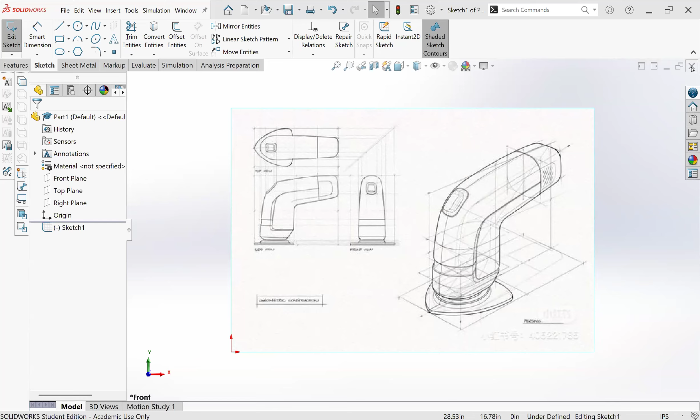All the fillets. For the first step, I'm taking a screenshot of each of these so I can upload them in the corresponding plane. I came out of the file. I'm going to go to, for example, my front plane and bring in the front view of that model by going to Tools, Sketch Picture. So this is the front view.

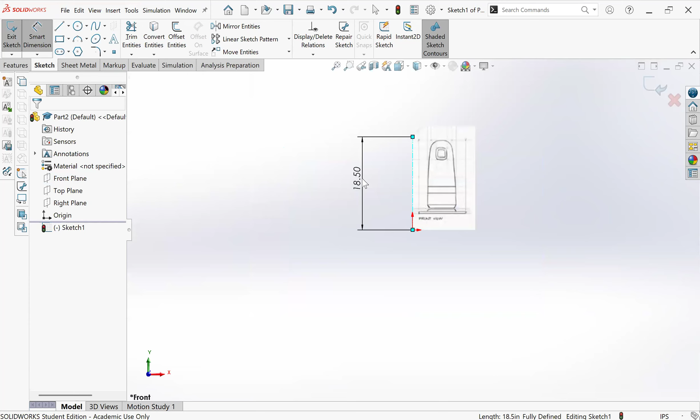I already measured the full product is 5.5 inches, so I'm adding a center line for that measurement to help me resize all of my images. I'm going to try my best to center this hand sketch over that center line and bring in each of these sides one by one.

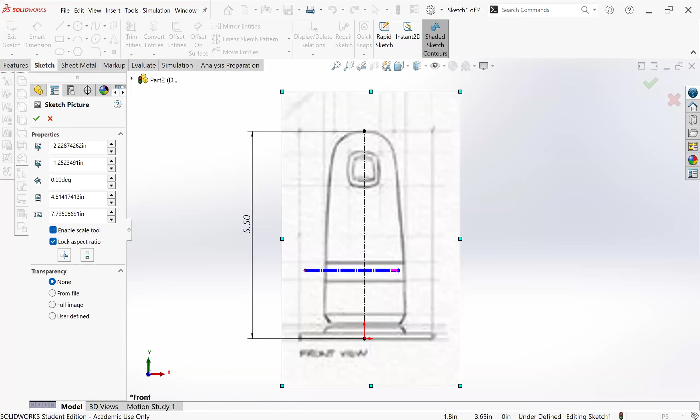That looks pretty good, I'll go a little bit lower. All right, I'm happy with this. I'll just do a slight transparency, maybe 20%, since it's a light picture. So this sketch is done, and this is going to be my front view.

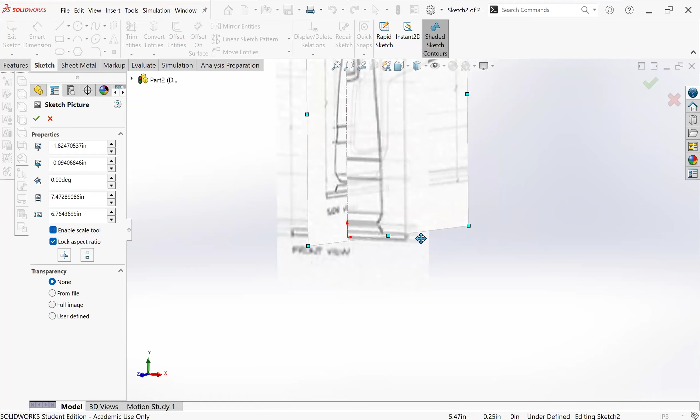Then I will go to the right plane and we'll do the same thing over here. We're going to bring the side view, and this time we're going to use our reference on the front to resize and match up the sketch together. So basically the middle of center will be there. I need to check the heights.

This portion takes slightly a little bit of time, but once we have all of them, we can see that this line and that line are matching, so that's good. I need to check the bottom. So it looks like my height is matched.

We need to make sure this is also on the center of the image. I'm going to slightly rotate to check these lines are matching up. This top line is slightly off, but this line's matching up, so I might just make my image slightly larger. Now we have all these lines matching up.

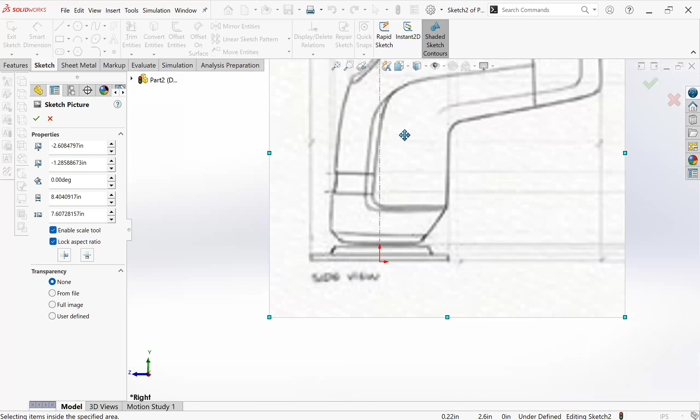I'm going to double check from the front and back, make sure this is centered to that. I think I can push it a bit more forward to center this. And also I can look at the button. Sure, the button does not look right.

This looks too large for the button, so I need to move this down. Let's double check again, now it looks good. You can see, so there's a line. Okay, I'm going to check on this as well.

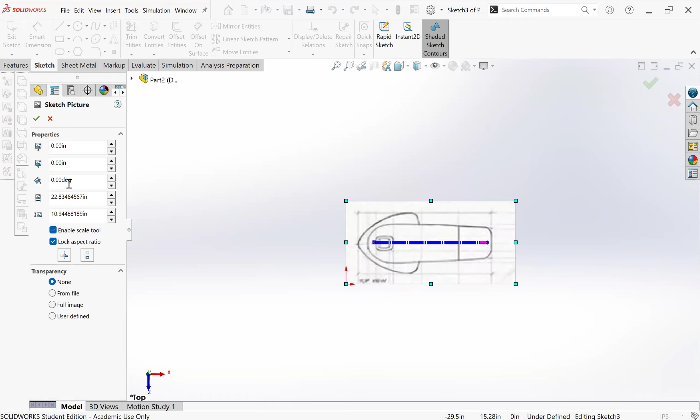Now we have only the top view left, so we'll go to the top plane and do the same exact thing: Tools, Sketch Tools, Sketch Picture. This would be our top view. If it comes rotated, here you can change the orientation, say 90 degrees. Okay, that works out. Need to minimize this.

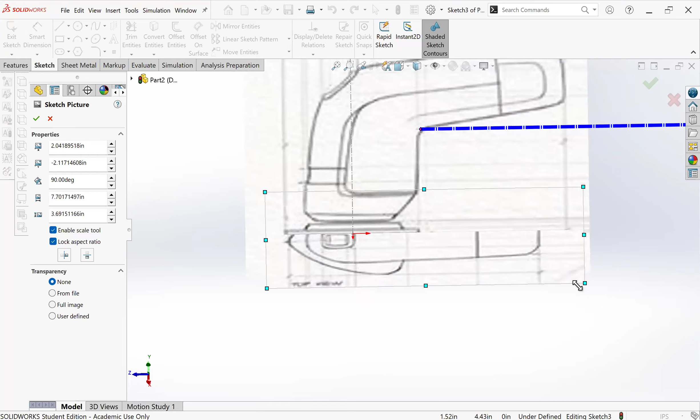The reason we bring in actual hand sketches is because if we design in SolidWorks, everything looks very geometric and clunky, and you don't get those gesture lines or nice curves that a hand sketch has. So that would be the main reason. To stay true to your design, you can bring an actual picture in here and try to follow and build on it.

So I'm trying to match that side. Let's see. Looks like this line should match with that line. Okay, now it's better on this. This back is also looking better. See?

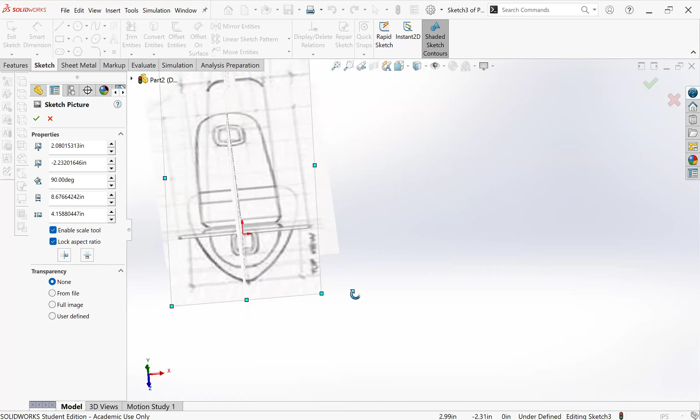Let's make sure it's also centered. I think this needs to go slightly that way. This looks a bit more wider. Let's see if I make the whole thing a bit larger.

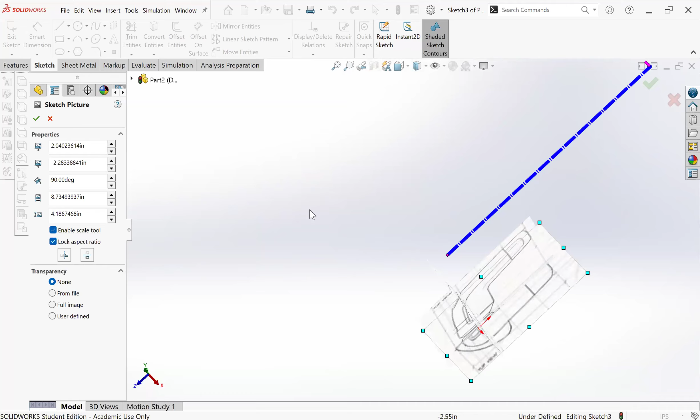So this front also matches. Check from the top again, make sure it's centered. It looks pretty centered.

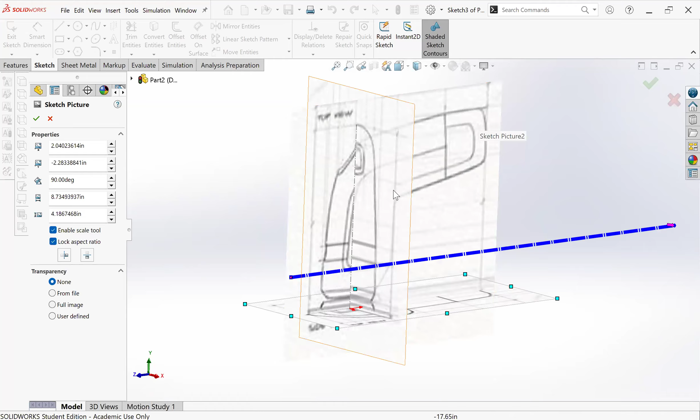Okay, so we have all three images here. You guys can almost see the product. I might go to the first one and drop it, or the second one and pull it up a little bit so these lines match. As we can see, something shifted on that one.

So it takes a minute to set this up, but once we do have it set up, everything else will be really easy and smooth. Okay, again, I'm looking at that line, that curve, and I think this is slightly below the origin, so I'm just going to push this up.

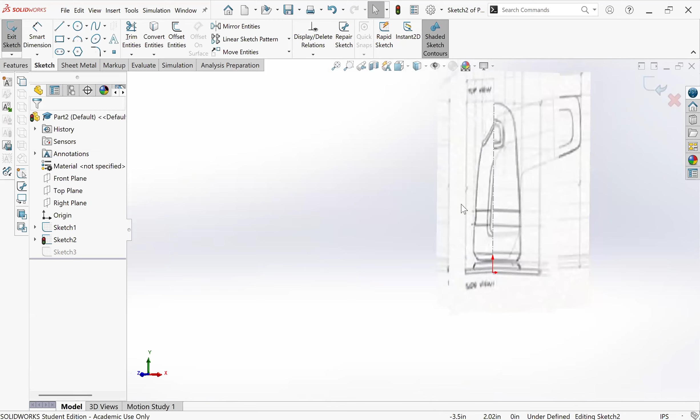Okay, that looks much better. All right, so now that we have all of our form here, we're going to talk about the process of building this product.

If I look at this product, there's a body on the bottom and this main form. The body on the bottom is pretty simple, with a few extrusions done here, and then we create a connecting cylinder into the form. But this main body just uses a loft, and we need multiple planes to do that.

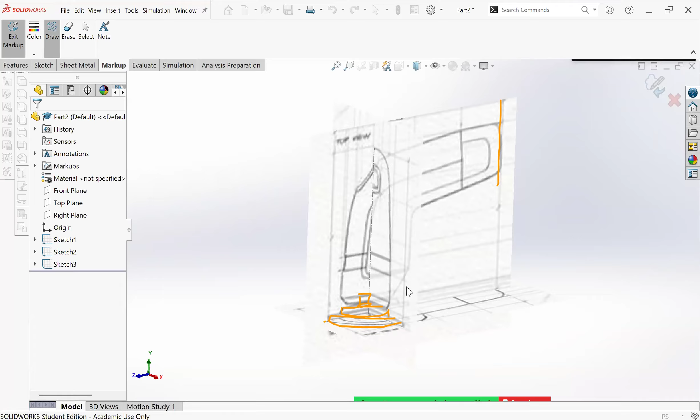We definitely need a plane on the end. We need a plane right on the back. There's a slight slant, so we need a plane right above that slant. And because it's curving, we're going to add a plane over here.

So we have three sections. Then we also need guide curves connecting all of our sections together. For timing, we're definitely going to ignore any details that exist, so no button, none of these cuts. We'll have two main bodies when we're done with this whole form.

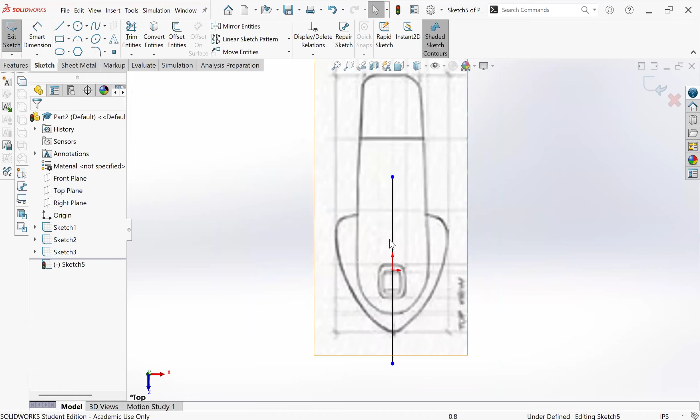All right, let's start from the base, the easy part. We'll start with the top view and use my center line, the midpoint center line, because this whole form is symmetrical. I'm just going to use that to my advantage.

This is the construction line. So definitely, anytime you mirror a spline, you need to set it perpendicular to that mirroring plane or line.

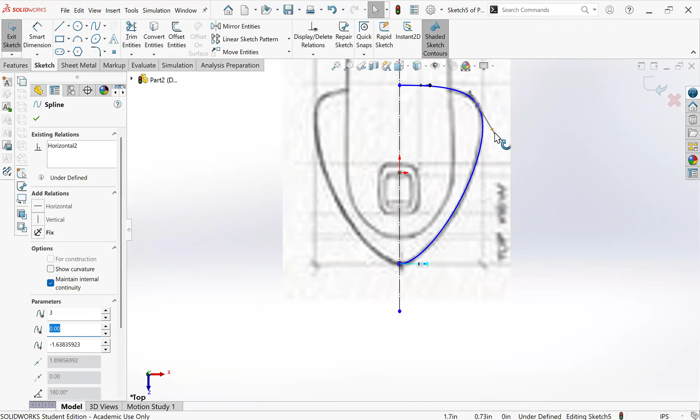Use as little points as possible. The more points you have, the less smooth your curves will be. Okay, this is good. Now I'll mirror this over this line.

Perfect, with both sides. I can push this slightly so the other side also looks a bit bigger. That's exactly why we mirror things. All right, this is done, and it will be a simple extrusion. Let's take a look.

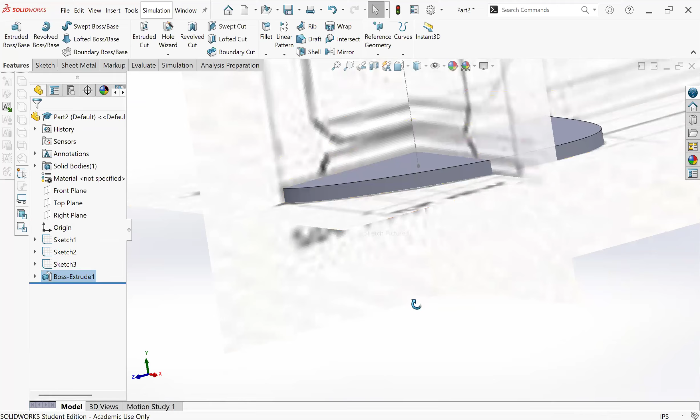So it looks like about 0.15 inch, and the next portion is actually a circle.

We're going to come on top of this shape and do a sketch. I'm going to be aligned with my center, but I'm not going to click on the origin because I don't know if this origin is the center of my shape, so we don't hook to that. In case you did hook it, and then you come in and realize the back is way farther back and this needs to move, all we need to do is delete that relationship.

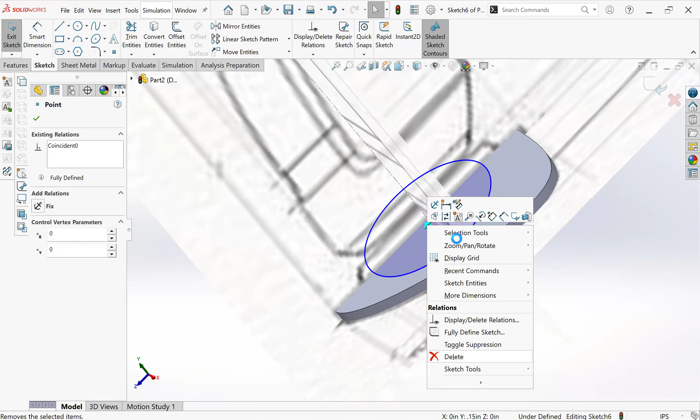Okay, so I can see that this should move slightly back, and I need to make it slightly larger. Okay, the sides look okay, the front still needs a bit more. I'll shift this more toward the front.

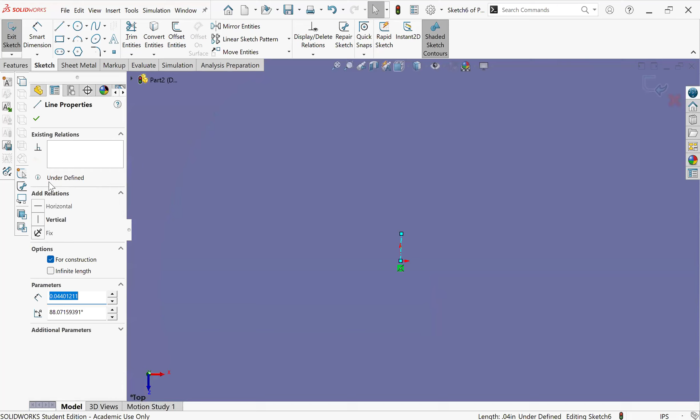Okay, let me double check. It's pretty close. I'm going to put a center line from the origin to this to make sure I can have this be vertical. Then we'll give a measurement of 2.3. That seems precise, we'll keep that.

Looks like this form here has a slight slant, so we'll extrude it with a draft. Let's do a 0.2 maybe. Yeah, that looks good, and we're going to need a slight draft inward. Clicking on the draft, we're looking at the back and the front. Okay, yeah, that looks pretty good, so let's do a 25-degree angle to round things up.

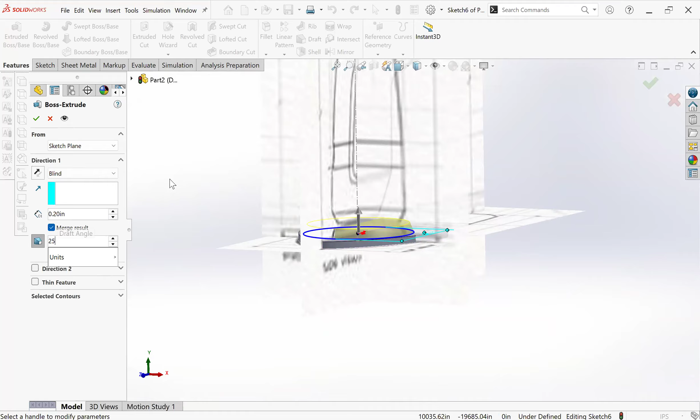All right, we have two of our forms done. Now to click this into the body and the motor and wiring part, we do need a cylinder, which we cannot see, so I'm just going to come in and add a small cylinder anyway.

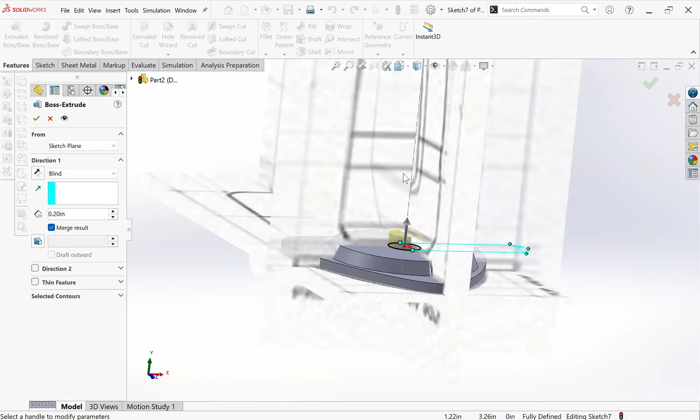So here we go, I'm going to do this. Imagine this would be a part that connects to the rotational or vibrational portion. Feature extrude. Also, because this has to go into a pin, I'm going to do a thin feature on this, maybe on the inside, and go up for 0.5. So it's basically connecting the sander to the other part.

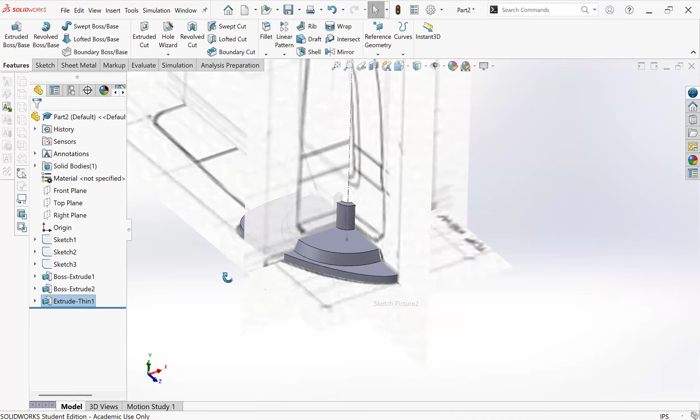Okay, so this would be our body number 1. And we're going to come in now and build the planes to create the loft for body number 2. Because we have this slant here, I'm going to start my first loft above this, so it's going to be a plane over here, one here, and one on the back.

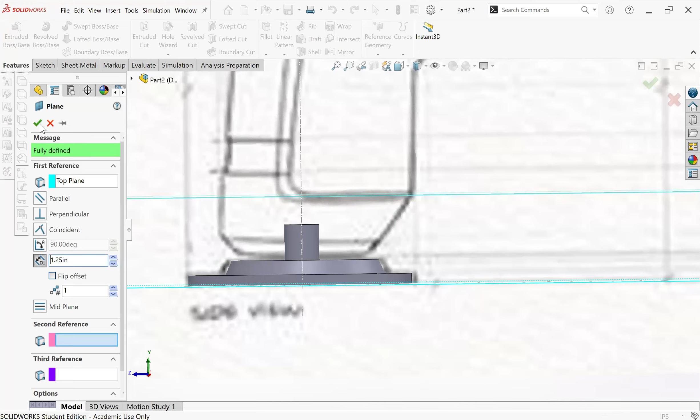So when I click on the top plane, hold Control, and come to the side of it, once I see the 4-arrow, I'm going to click and drag up. This copies in parallel. Okay, so 1.5 maybe, just to round things up, and I need one more in the back.

Front, we'll hold control, click and drag. That looks good. We know there's a slight slant that could be achieved with a fillet later on.

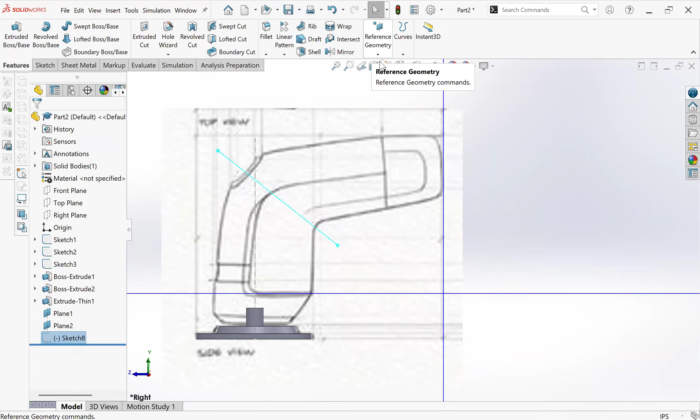Okay, now we need one in the middle. To create a plane exactly where you want an angle, one way is to just draw a line where you want your plane. So this is going to be my line of reference. I'm going to come out of the sketch and go under features, reference geometry, and plane. Now we pick this as a reference geometry. We also need a secondary reference, something that would be perpendicular, which would be the right plane. Okay, so now that we have a fully defined plane, I'm going to turn off my sketch.

Okay, good. So now we have 3 planes where we need our sketches. I'm going to make these slightly smaller so our view is clean and clear.

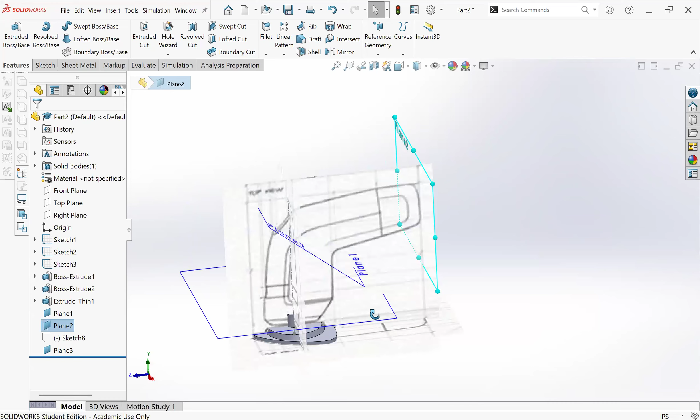Okay, we'll start with, so because the form is symmetrical, I'm only going to build half the sketches. We have one side flat, so that would be easy. The other thing that's really important to pay attention to: this back part is more of a square, but the front part is curved. So if I go back here, so you guys can see the image, sketch tools.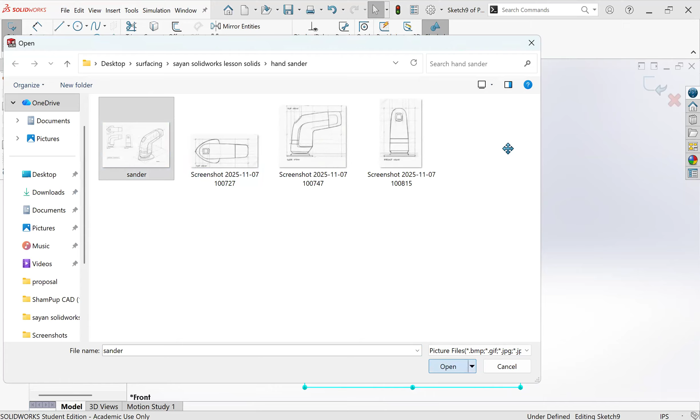So if we look at this one, can't make it any bigger. Just open it, probably, so we have it as a view. This front is rounded and the back is flat.

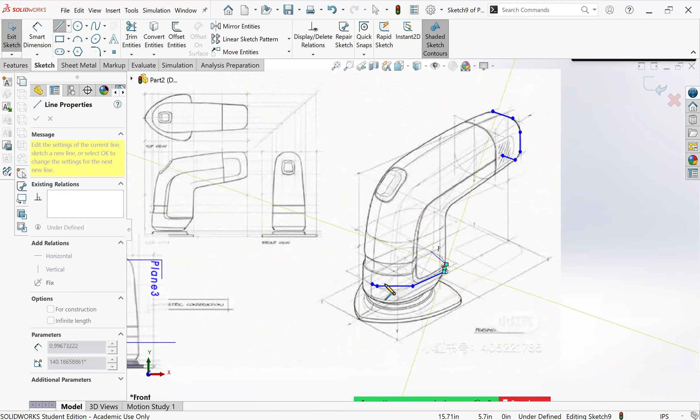The key is the lines going from one sketch to another sketch. For example, if I have a line here, and then a curve, and then another line, then a curve, and then another line, so we have 3 sections of line and 2 sections of curve, that's 5 sections. So when we come here, we still need to do the same thing, we still need to find 5 sections. That's the key thing to get smooth lofts.

All right, I'm gonna come out of this, that was just for the reference. And we'll come to our plane 1 and start sketching. Let's start with a rectangle because we're starting on one side.

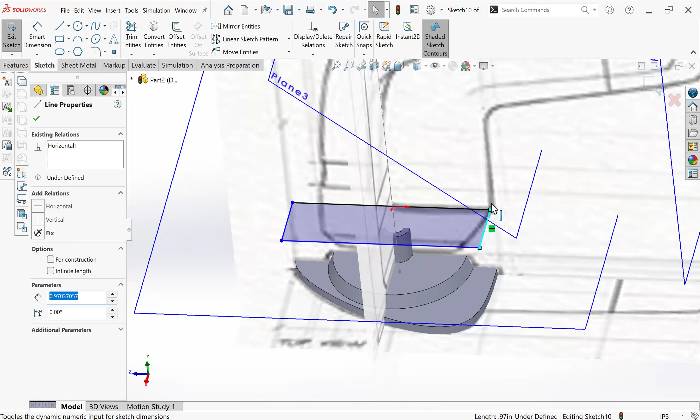First, I need to make sure this origin is on this line so we don't pass the midpoint, because we are trying to mirror the whole thing. So now I'm looking at that line, trying to match up, and also on the front. Okay, now we'll look from the front.

Okay, this needs to get slightly wider. Even more. And I can look straight down. This actually looks pretty good.

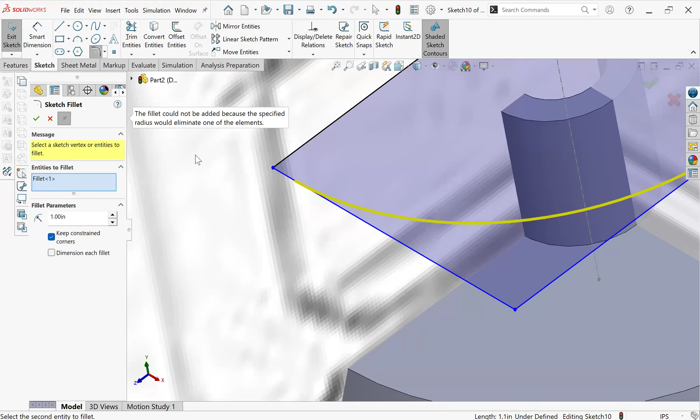So now we come in and fillet. The front has a very large fillet, the back has a slightly smaller fillet. The front's almost smooth, but as you can see, I'm leaving a slight flat, I can't go any more, so 1-inch fillet with a slight flat. So when we go to the back, they kind of match up.

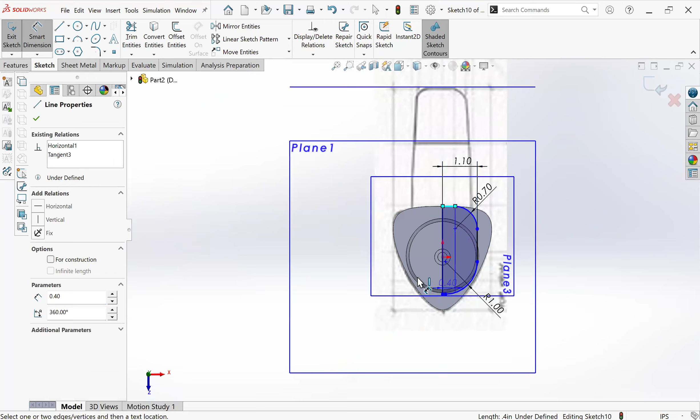Okay, and then this one we're gonna go down, maybe 0.7. Okay, so the sketch is done, gonna finish and come out. I did not add any measurements. We can, sorry about that. Let's see, this is a 1.1, and our height is, I'll just do it, 2.7 to round things up. Okay.

Now, line number 3. I'm gonna do another sketch, one more time, a rectangle, then this side. Need to match for this end.

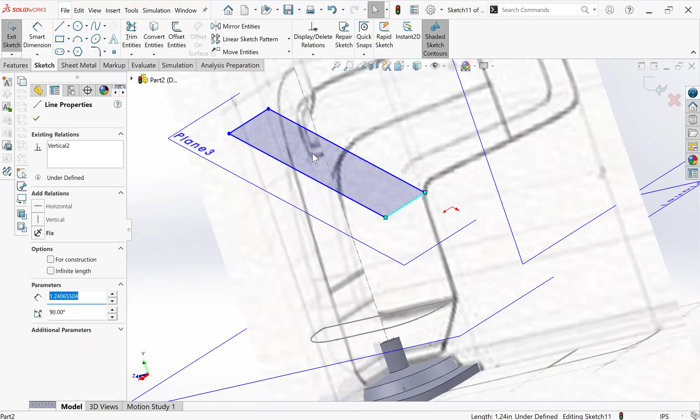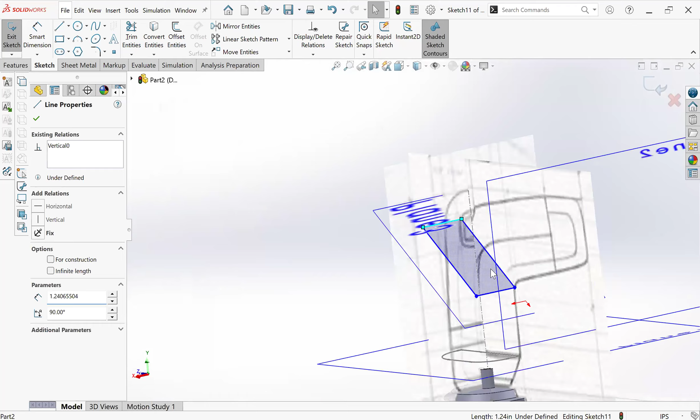On the top, up here, we're gonna ignore the button as if this curve was complete. So I'm gonna come in, probably a bit lower than that. It seems okay. Now from the side, also needs to line up. It's slightly tricky. That might be decent.

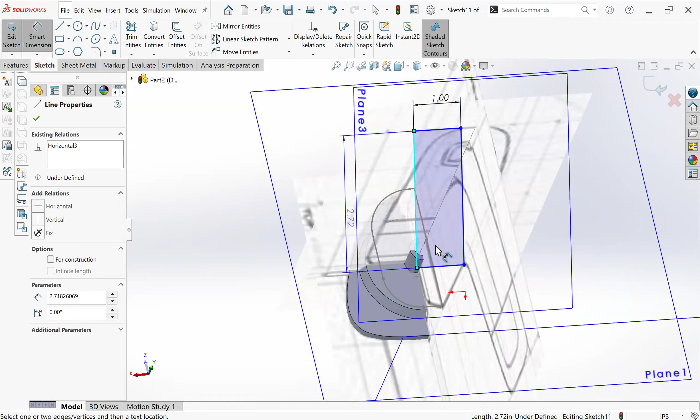Okay, let's do some measurements. I'll just do a 1 inch on this one to round it off, and again it's a 2.7. And need to make sure we're aligned with this origin so it doesn't shift past the midpoint. I'm gonna do this and set that to be vertical. Oh, the other way, horizontal actually. Right now it's just turning black, which is what we want.

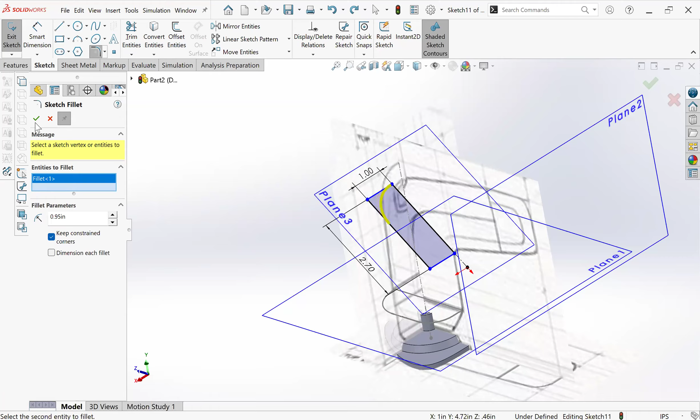Okay, let's add the fillets. That might have a problem with our 8, 9. Okay, I'm doing 0.95 because the other fillet we did was a 0.1, was 1, and then this is slightly smaller. Now this one we're gonna go even, so it was a 0.7, so I'm gonna try to do maybe 6, slightly less, and this is done.

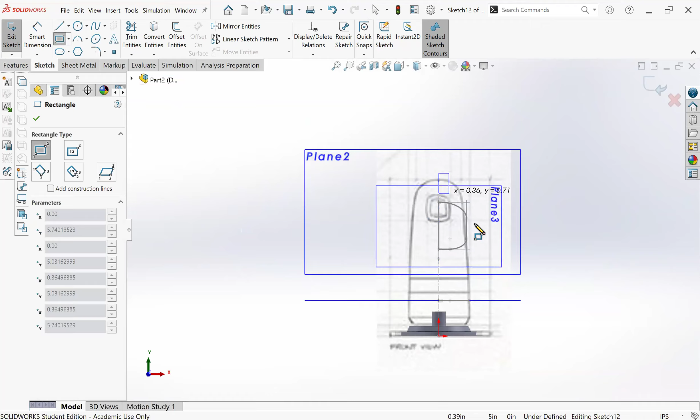Now we'll go to the last plane, and this would be the easiest of all because it is a rounded square. One more time, I'll start with a rectangle, then try to match the top and bottom. I want to kind of imagine if this line continued, how that would look.

Okay. And there's that line. I look from this side now. Somewhere there.

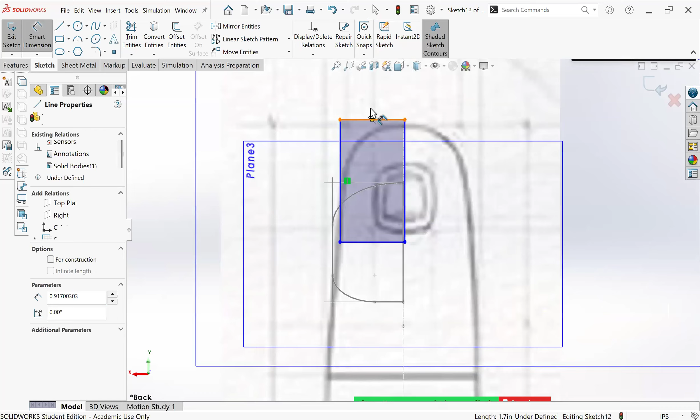Okay, let's add some measurements again: 0.9, and 1.65, or it could be a 1.6. So it is slightly getting smaller, this whole product.

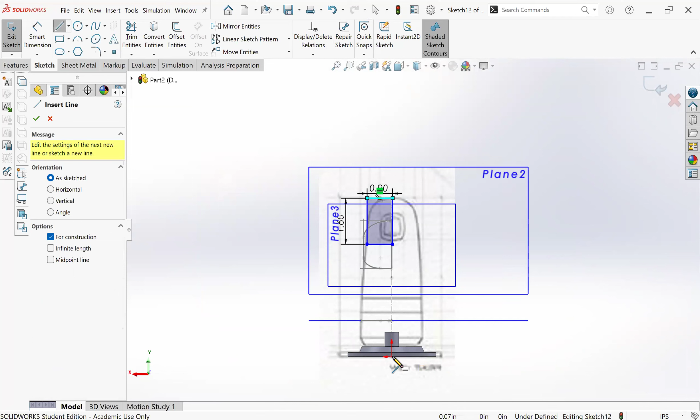I do still need to make sure this is staying on the correct half. So a center line, setting that to be vertical. It might also get smaller than this because the front was 0.9, so let's do a 0.8.

So this is now a square because 0.8 and 1.6. Now we'll come in and add fillets, and the fillets are even. A 0.5 fillet, should reduce one. I think 0.5 is looking okay.

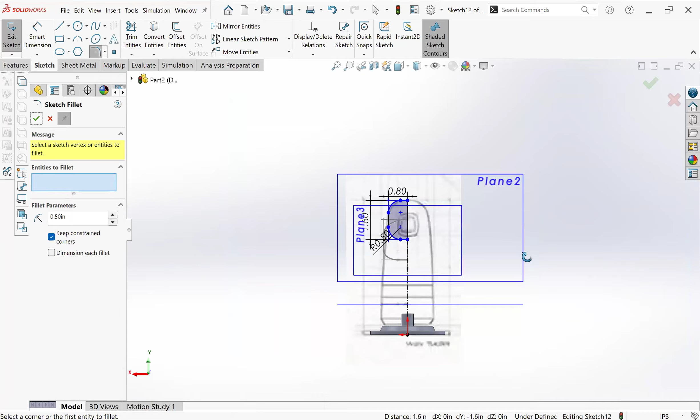All right, that works. Let me see if this needs to be slightly lifted to that line. Yeah, so now that we have all of our three sections, I'm actually gonna hide these planes. Now that we have all these three sections, we're gonna come in and put a guide curve here and here. Make sure you save your file.

So I'll go to the right plane and use the spline tool.

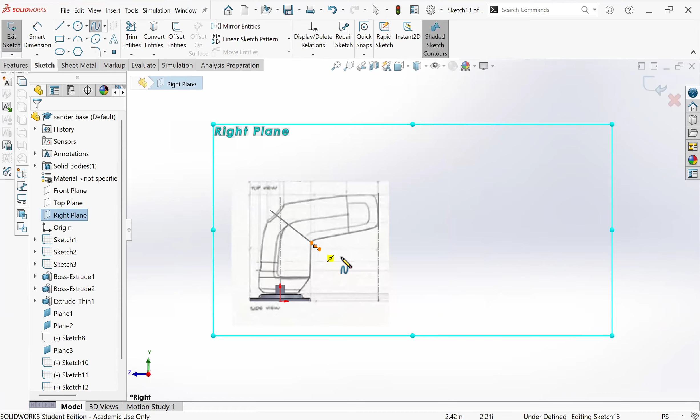This is important, we only have three sections, so we only need 3 points. Just gonna make sure I click on them. If they don't click, you can later on, for example, I'm just gonna set this on the side. If it doesn't click, you're gonna come in, select one, hold shift, select your other point, and press coincident.

So now you know they're actually over there. And when I try to pull this, you see this was not connected. So one more time, when I click this, hold shift, go like that, and coincident. Now everything's black.

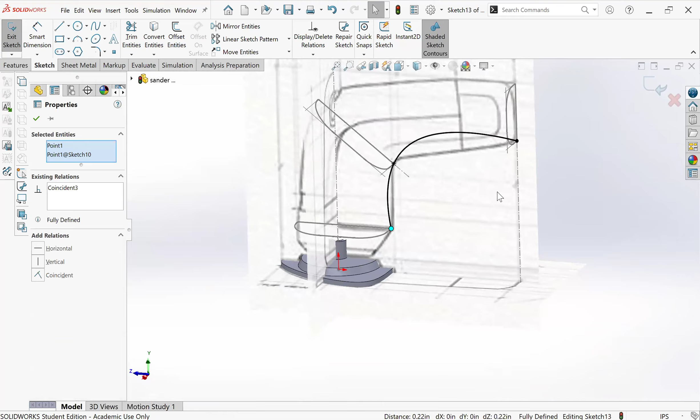So trying to match this the best we can. Okay, that's slightly better, it needs to come down.

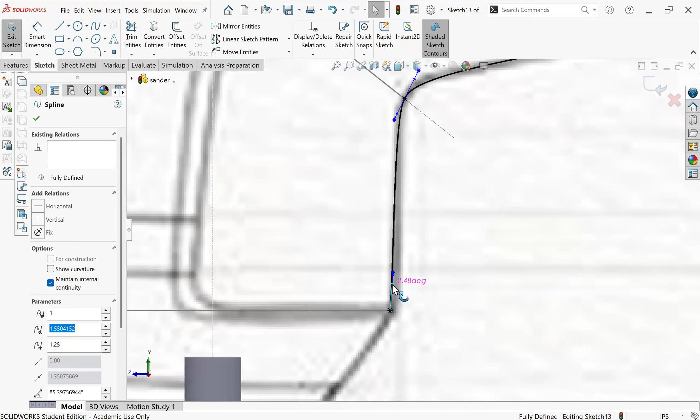Right, this is one of our sketch. Now we're gonna do the top one. They are on different planes, on different sketches, so we can kind of keep track of them.

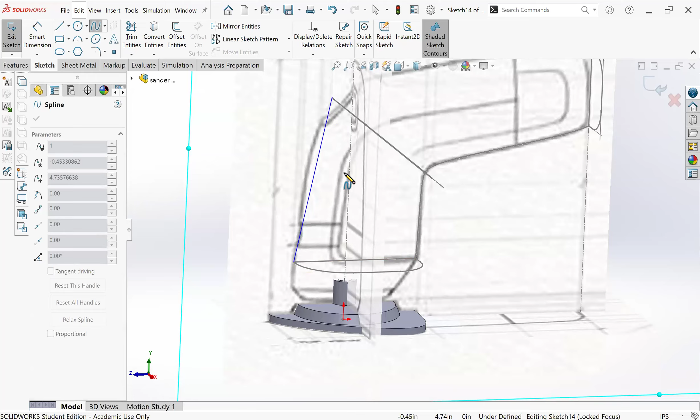One more time, trying to hover where we can see this point. It doesn't let me click on it. That's okay, we'll come back to that one.

Okay, so this one, holding shift, and I find this point. Say coincident.

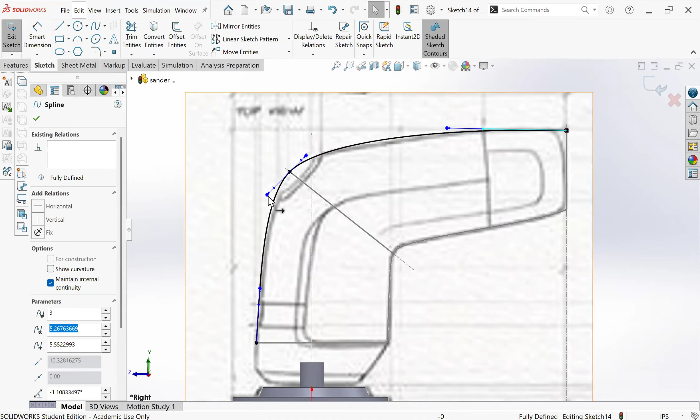Now, so we're assuming this is a full curve, and basically the bottom is not existing at the moment.

So, okay, if there's a big kink here, because we're gonna come in and cut all of that anyway. So I'm going with it's better on the top. There we go.

Okay, close enough. Let's finish this, and so now we have all of the elements to create this loft. So let's do features, loft.

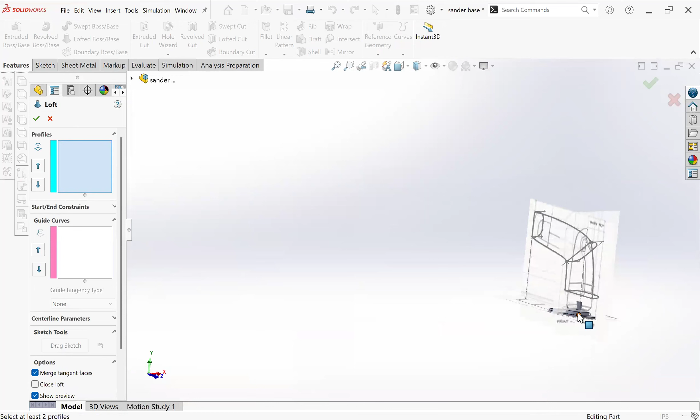So it's important to pick the loft in order and try to pick the same side on each one. So if I'm picking the front of here, then if I pick the back over there, it will twist it and doesn't know how to make it.

However, if I bring this point back to the front, it will start building it. So it's really important where you select. All right, we'll see something.

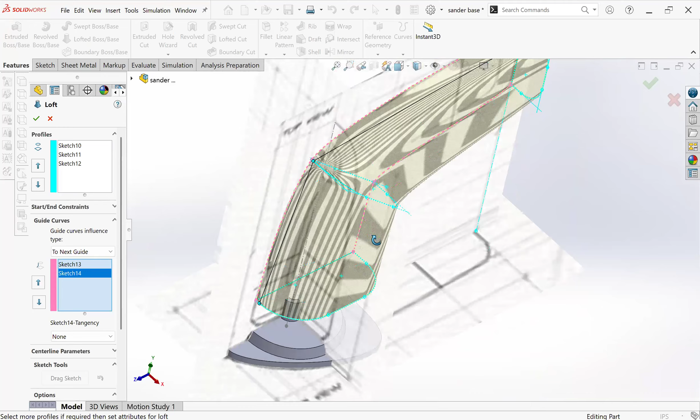Let's go to our guide curves. Let's add this and add this. All right, nice, looks like we have a smooth loft happening. We'll press OK. All right, we got our main body here. Good, now we need another loft for this portion.

So we can use this face and just do a sketch over here on the bottom and see how that works. Just double check the picture.

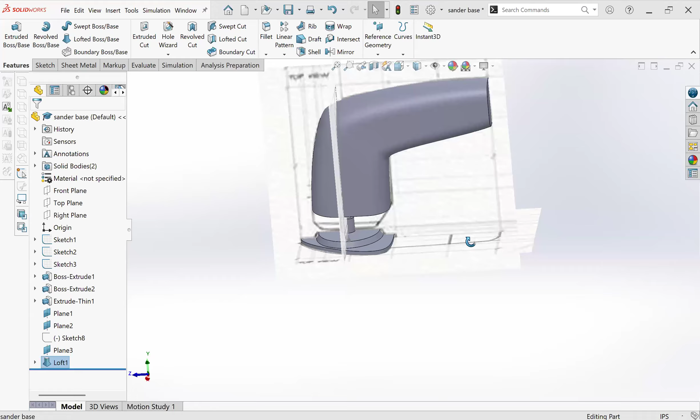So we basically have the same form down here, except there's a slight slant. So we need to create one more plane on that line. I'm going to turn on my planes so I can see.

I'll start with the top plane, just by basic, holding control, clicking on the edge and dragging up. This one, give that 0.6. Let's see if that works. Yeah, 0.6 seems okay, 0.65. Also 0.65 looks good.

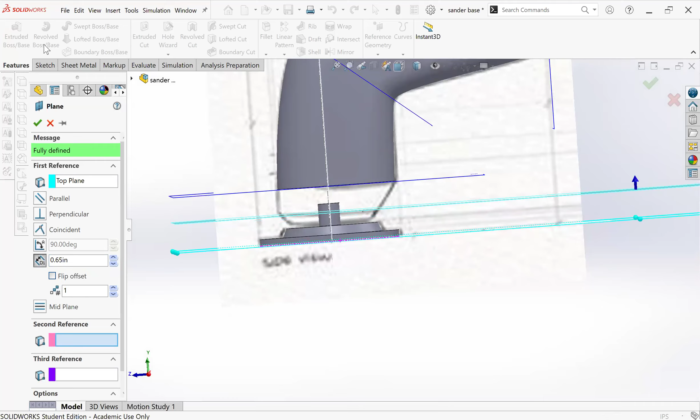Okay, gonna go on that and sketch one more time. We have a rectangle. So the front is basically the same point, so I can actually go and line that point up.

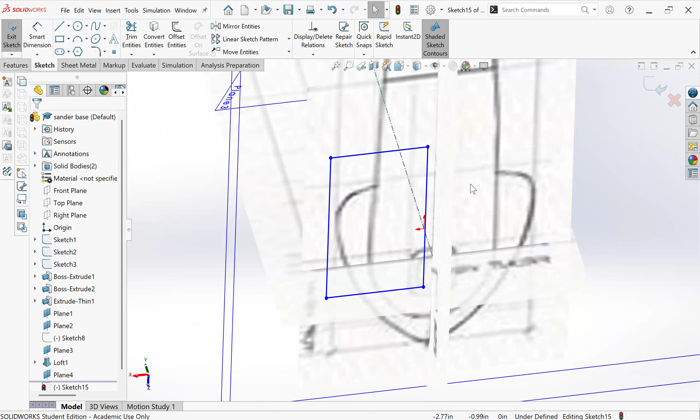Pull this back, making sure the origin of the origin, but so I'll click on this point and trying to capture the origin so I can set them horizontal.

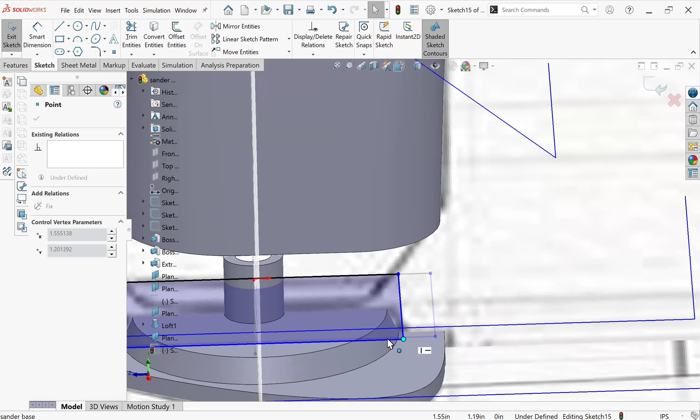No, it's supposed to be vertical. Looks like it's on the line. Trying to kind of match this front, although the sketch is slightly off.

Okay, and from the side, we have a good reference there. Let's do some measurements. So this is like the top one, 1.1. And this is going to be slightly different.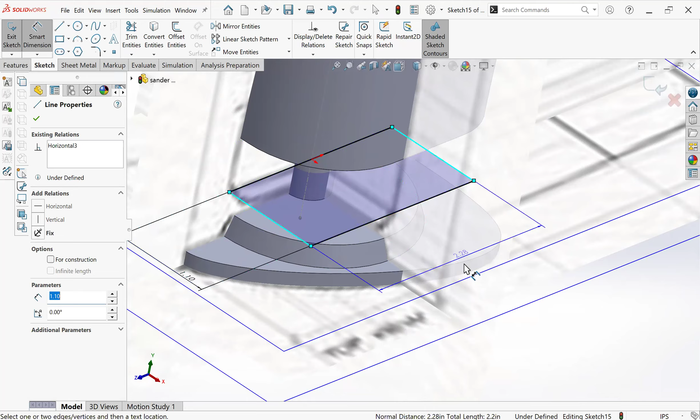So I'm actually going to measure line to line. 2.28, so we'll do 2.28. 2.2, I'll keep it 2.28.

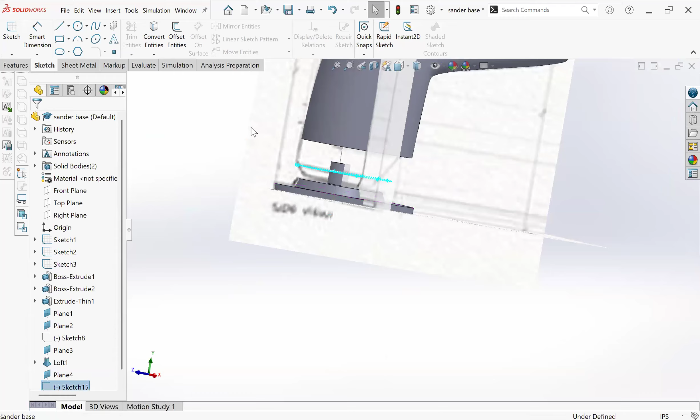Okay, our sketch is done. Now we're gonna come in and turn off the planes. And we're gonna come in and loft that face to the sketch. So feature, loft, sketch is chosen. Now I'm gonna pick the face.

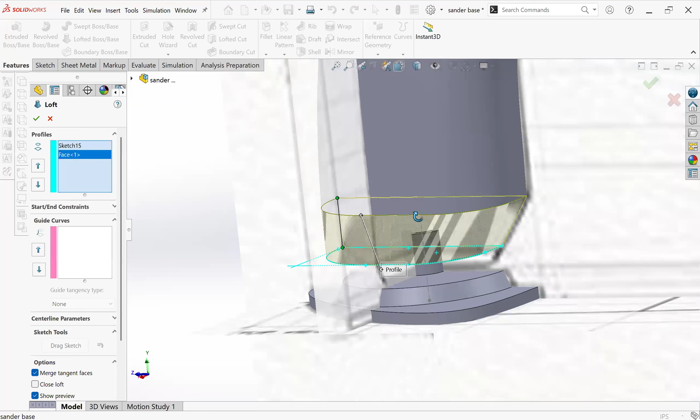Need to make sure this is lined up, these points. Okay, now we're going somewhere nice, it's looking good. Something I'll show you guys and come and fix. So we do have a clear dent here, but also on the front, if we look, actually it's pretty smooth.

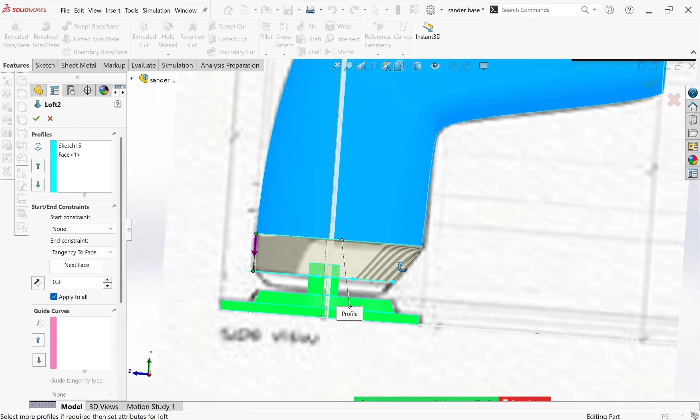To get a better transition, there's one more step we can take. Under the start and end constraint, for where you pick the face, for me that was the end, I'm going to pick tangency to face. Then push this back a bit, but the front's going to be really smooth. I'm just going to go down until I achieve that slant, but also get a little bit of tangency. So now it's even more smooth.

Okay, let's put this back with the lines. Lastly, we need to take that and kind of extrude out. So I think this is a good time now to mirror over and have both sides, and we can add that section later. One more thing, we wanted that top body to be a separate part.

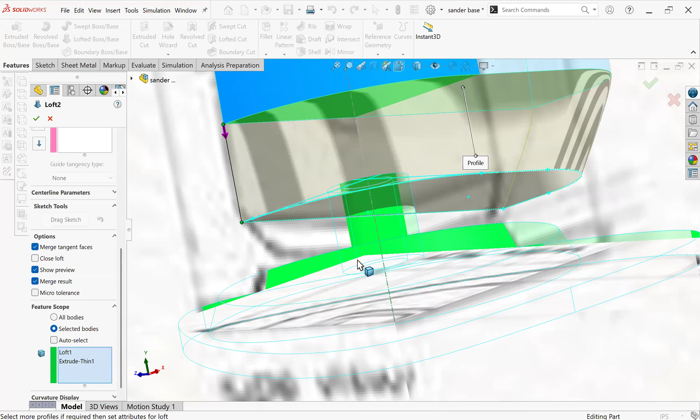So when we are doing a merge, we need to make sure what we are merging to. So here has two bodies to merge. We don't actually want to merge to that one, we just want to merge to the top one.

All right, because I'm going to use a draft on this one, it doesn't work if I do a half, I have to do full so I can draft it. So let's go ahead and mirror this body. The right plane is our mirroring plane.

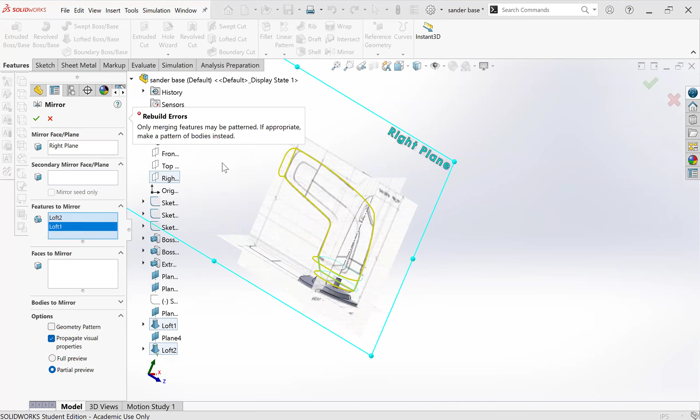And we're going to have features, two lofts, loft 1 and loft 2. Only merging features can be patterned. Oh, I think they are merging. So let's see, if this loft doesn't work, we can always use the body loft mirror, so I will use this one as a body. And now we have the two sides.

If I turn off the sketches, you guys can see I have a really nice main form here. We haven't done any of the fillets yet, those would be secondary. But right now these two bodies are separate parts. Because I want to do extrusion on the bottom, I'm just going to come in, select both, and combine them together, add.

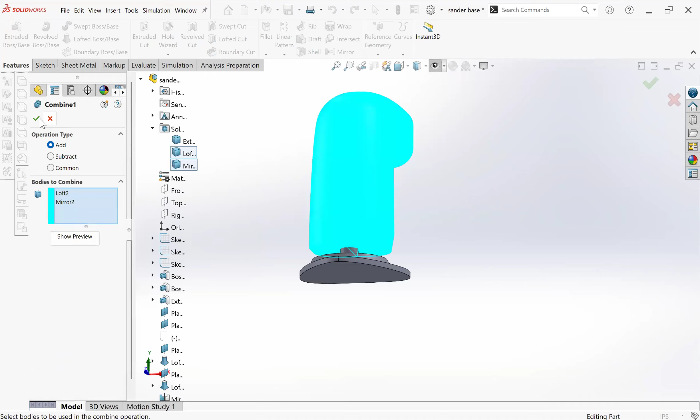So now I can use the face to sketch, convert, and do a slight extrusion, with 0.1 extrusion with a slight draft.

So let's try to look at our images again. Needs more extrusion, so maybe 0.2. Let's try that. Yeah, that seems good. And so I'm going to try to match this back, basically.

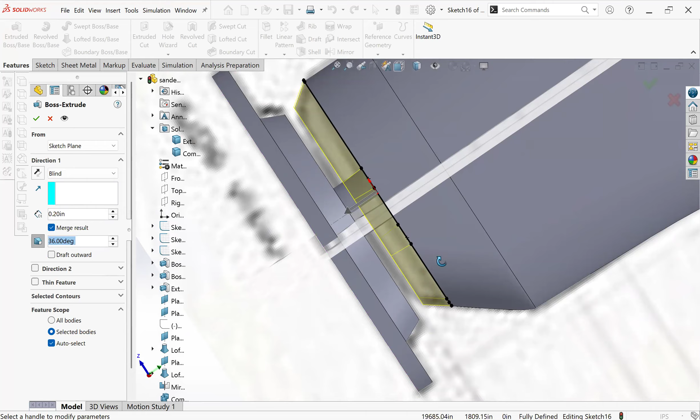Okay, and press check. So we have our main body. The only other thing, oh, something I forgot, on this one also we can merge everything together. We are also only connecting to the top portion.

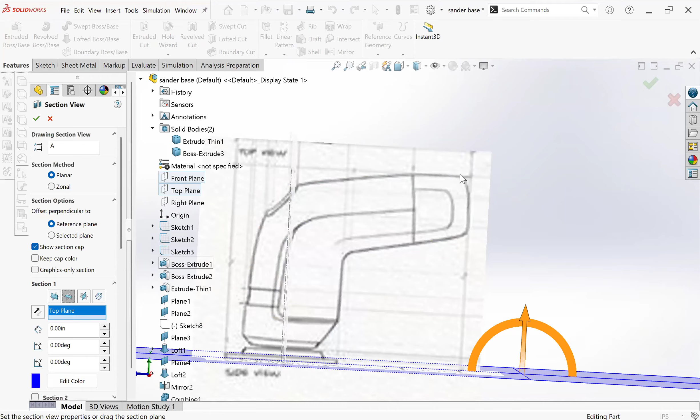The only part that I want to show you guys is how to do a multi-radius fillet on the back, so we can achieve this, like more rounded on the top and less rounded on the bottom.

We'll turn off these and we're going to go ahead, go on fillet, uneven fillet, basically variable size fillet. I'm going to click on this. So it's basically always the start and end point that you need to add. So I'll just type in, I'm going to do a 0.4 to start with. That's also going to be 0.4.

And I'll come into that one, maybe this is a 0.3. Let's see, okay, it's working. Maybe a 0.25, let's see if we can get it smaller. Nice. And this one, try to do a 0.2 and a 0.2.

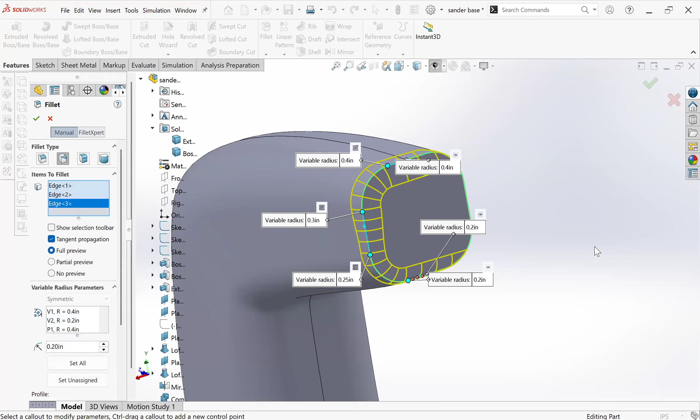Okay, so kind of have to continue that on the other side, so that is also a 0.2. This is now 0.3. It's very common that this variable fillet will not work or break.

So first thing is to save your file before you do this. Second thing is to just slightly play with the numbers and go down and gradually change so it can follow your curve. We'll look from the side. Let's see, still a bump there. We'll see, there is a straight transition.

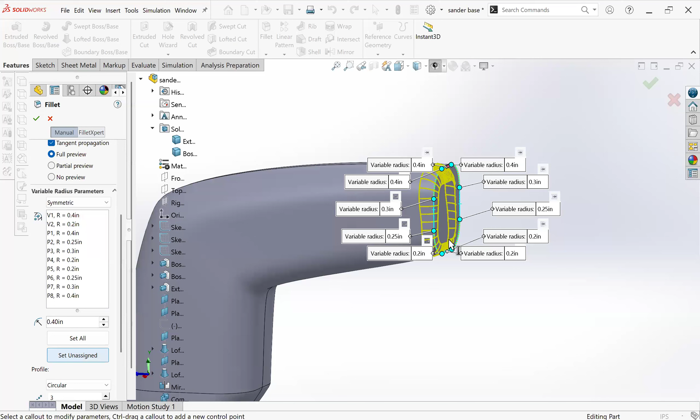Let's see if that helps it slightly. I think this change from 0.3 to 0.25 is too much, I'm just going to do a 0.28. That's slightly opened up, so it looks better.

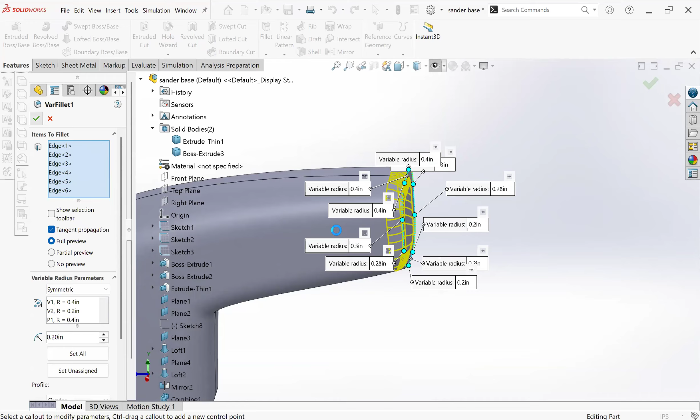Let's look at it now. We also have this one at 0.28. All right, let's check. This doesn't seem... We'll try. Yeah, it is definitely like the top is twice as big as the bottom, but because of the form, everything looks very rounded. Okay, we have the main body.